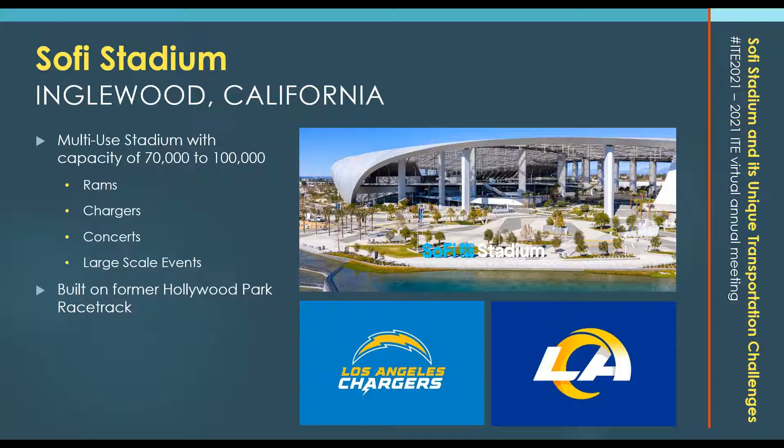But putting in a new stadium is never without its challenges. For starters, the SoFi Stadium is essentially right in the middle of the city of Inglewood. After review of the most recent stadium builds and a few classic ones, the average motorist distance to the highway is significantly higher with the SoFi Stadium. Obviously, this driver distance from highways isn't the most important metric, but it can heavily impact operations from signalized intersections, pedestrian movements, and other factors that bring friction to inbound and outbound traffic flow.

The bigger point is that many other sites are close to the highways to push traffic into free flow operations quicker, whereas the SoFi Stadium exists on a grid network with multi-directional traffic flows, resulting in higher impacts at the core and on existing background traffic operations. So the big question is, what's the best way to get folks in and out?

Developing a stadium in the middle of a built-out city comes with challenges. The first challenge is SoFi Stadium is surrounded by mostly residential neighborhoods. Furthermore, Inglewood houses a large number of people of color and lower income residents. Due to the makeup of the city's demographic, the effects of gentrification and displacement are already felt, and building in a stadium only worsened those effects.

When putting the traffic management and operation plan together, one of the primary missions was to minimize the impacts to the quality of life for the residents. And adding onto our big question, how do we get stadium visitors in and out while not negatively impacting the quality of life for its residents?

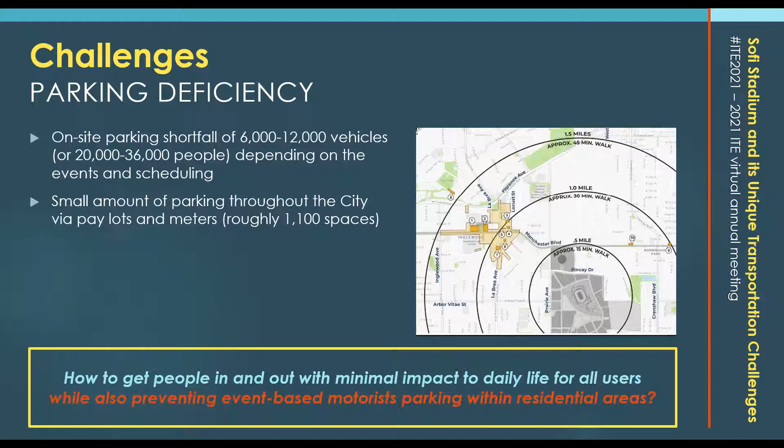To get a ballpark estimate on where the future vehicle traffic might be coming from, we use zip code data of where past Chargers and Rams season ticket holders were located in developing this estimate. This data is a proxy and might not fully reflect the true conditions, but it allowed us a starting point to iterate from. We then percolated those numbers through a volume distribution model that factored in parking lots, preferred routes, modal splits, and more to determine the path that users might take, as well as determining critical points of congestion and possible signal timing updates through our analysis model.

We also collected data at certain locations during normal operations to not only gauge current traffic levels, but also in developing flexibility by overlaying the event data over differing volume cases. This allows us to model unique situations, such as an event occurring during the PM peak at the same time as a forum event, or any other unique case we might be interested in evaluating.

We've talked about the challenges of this plan, but how do we address all of them? We've broken up the traffic management and operation plan into 4 key solutions: having traffic control officers at special intersections, stadium operations center, traffic signal timing, and transit and alternative transportation modes.

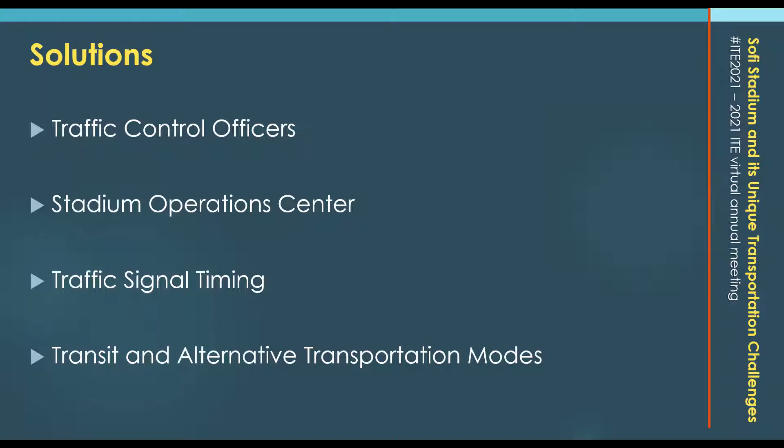The first we're going to discuss is the traffic control officers. We utilize traffic control officers at critical locations during event day operations. The TCOs ensure users are utilizing event day closures and geometric changes in a safe and efficient manner and get to observe what works and doesn't work for future events. They also help to mitigate any on-street mishaps that may occur, like a minor crash or driver confusion.

We expect a wide range of users on the city streets, including out-of-towners, and having someone point them in the right direction could drastically minimize effects when looking at a larger magnitude of visitors. Since we are prohibiting event parking on residential streets, traffic control officers help to minimize those impacts through presence and guidance.

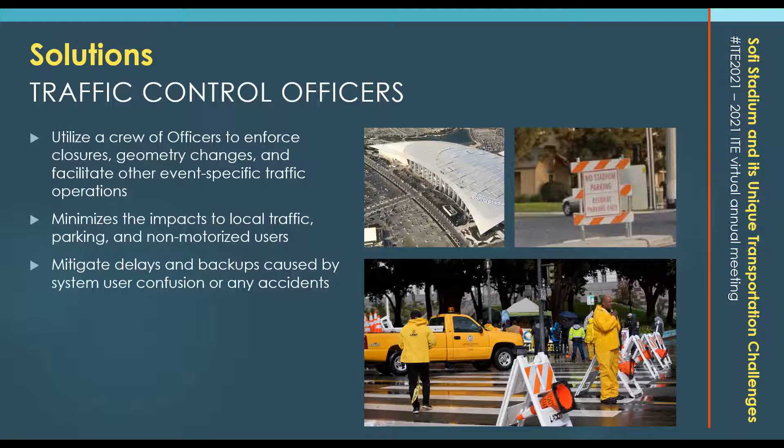In addition to having eyes on the street through officers, we also have 2 event day operator positions in the Stadium Operations Center to view all operations of traffic, signal timing, and ITS needs through live camera feeds. The Stadium Operations Center houses key personnel from the city's traffic, maintenance, police, fire, and parking divisions to create a streamline of communication with the stadium.

This central system is critical to the success of the traffic management and operation plan as it provides live views of traffic and is used to control the signal timing and arterial traffic flows.

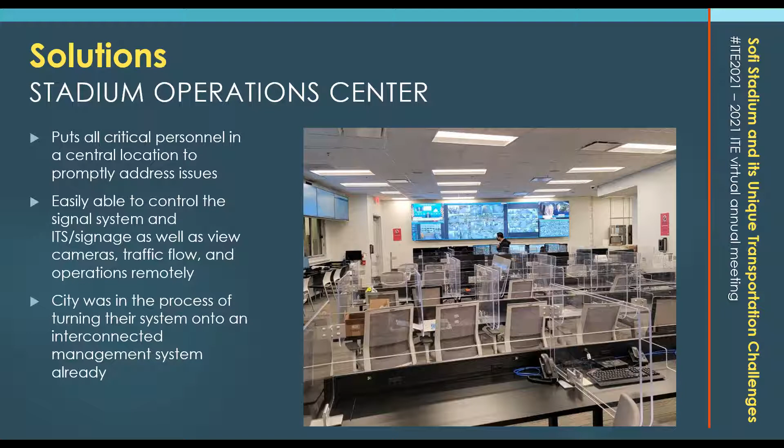A large part of our plan was developing adequate traffic signal timing. We discussed making everyday work for the city, and that goal was furthered by optimizing all of the city's 140 signals for daily use through creation of 3 to 6 timing plans. These plans progress vehicle traffic while still creating safe operations for pedestrians, motorists, and bikes by updating clearance parameters and walk times while still minimizing cycle lengths.

When it came to game day operations, we created 3 total plans for inbound and outbound traffic that use varying flexibilities in their traffic volumes. These plans were able to be turned on system-wide or by corridor from the control center, creating the opportunity to enable the necessary operations where and when they're needed in a customizable way.

Given the grid system of the area, we wanted to ensure that all of our corridors worked with each other on a cross-coordination standpoint. We also dug deep into creating systems of harmonic cycles, especially in the case of event operations. We're able to give higher cycles in the event core where critical conflicting movements are frequent, while creating half or even quarter cycles in the fringe and underutilized corridors.

This allows for traffic progression without the unnecessary cross-street and pedestrian delays, speed increases, and non-compliant safety issues that long cycles can cause. Lastly, we were able to progress our priority routes, such as our transit-only routes or reversible lanes into and out of the stadium.

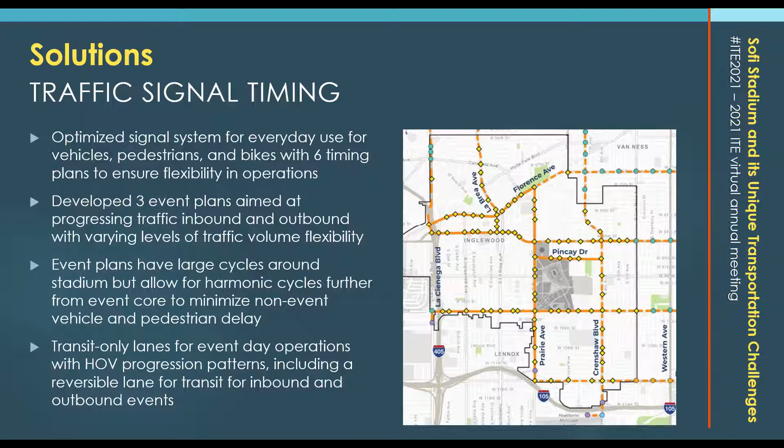Our last solution is related to getting people into the stadium in ways that aren't just parking on site. As you can see, we have many points to this, but we'll go over just the main ones.

We discussed transit-only routes, which our major route is on Arbor Vitae Street, which is directly connected to the stadium's planned intermodal on-site transit center.

In looking at other venues for the area, there's the ability to create a tailgate or party atmosphere off-site and bus fans in. The Hollywood Bowl does a really good job of this, for example, where the shuttle becomes part of the experience, and we took a similar note in our 9 park and ride shuttle locations.

The Crenshaw rail line isn't yet finished, but is anticipated to be a crucial aid in getting folks into the city and connecting Inglewood to the greater rail system for event traffic. We anticipate the line being open in 2022.

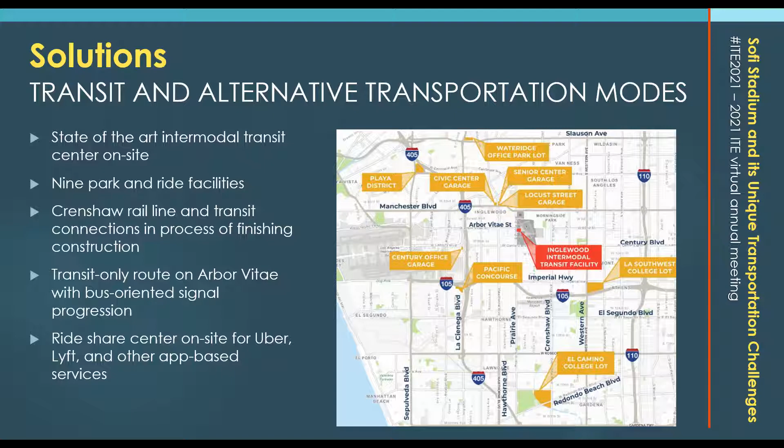The final touch is a rideshare center for folks that might choose app-based services to and from the events. These 4 major solutions really help to address the challenges the stadium might have with operations, parking capacity, and impact on resident quality of life.

Now the table is set for some big events with tons of fans coming in to check out the state-of-the-art stadium. Let's kick off the events with Taylor Swift headlining the first opening event of 100,000 people.

Now we all know what happened next, so we don't need to go too deep into that. But COVID-19 changed the plan for the stadium on top of the pain it caused in the rethinking of our current systems. The good news is that just like the rest of the world, we were able to iterate our plan and make things work out.

Also, it got Taylor to put out Folklore and Evermore, which, as a non-Swift fan, are actually pretty good. Anyways, back to the point.

Under COVID, there were some major hurdles to overcome, not only in our daily lives, but also in how the traffic management and operation plan for SoFi Stadium was previously envisioned. Construction schedules were impacted, funding sources frozen or eliminated, and traffic patterns changed.

However, one positive note came out of it: the luxury of extra time. This allowed the city to continue the build-out of the interconnect system, construct a more robust ITS system, fine-tune details of the plan, and determine if priorities changed and how to address them.

In addition, we were able to develop more flexible and phased operations that could more accurately reflect the slow ramping up of traffic volumes, activities, and events in general as restrictions are lifted. The ability to test our plan over an iterative process versus one large event is also extremely beneficial to fine-tune the process over time.

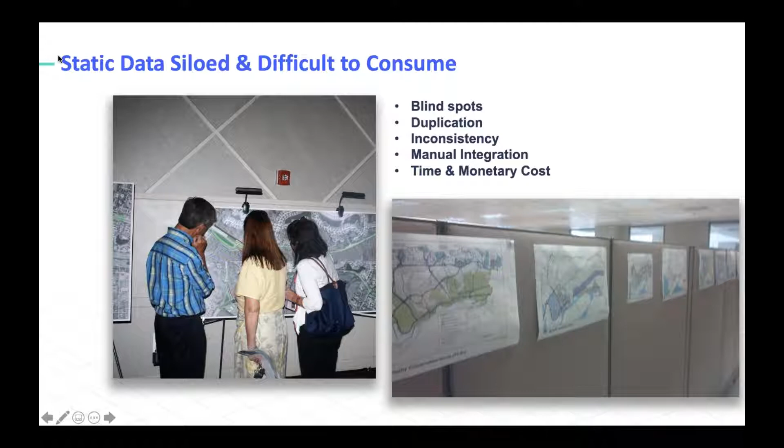And they're all facing the same challenge, that there's an explosion of data. More data is being produced every year than all of previous human history. But the tools that public servants have to access that data really aren't keeping up with the exciting opportunities of data. And data is oftentimes broken down into a number of different departments, agencies, jurisdictions, and even between the public and private sector, as we're going to show.

So what Urban Logiq does is take a 4-step process. We aggregate all of the government's existing data, regardless of department, agency, or jurisdiction. If it's something that should be made accessible to a public servant, we consume it into one common operating picture. We then automate workflows, identifying what decisions and insights you're trying to arrive at. And that often reveals where there is a data gap, as we discovered in the city of Ottawa.

And that's where I think there's an exciting opportunity to marry the explosion of data from the private sector, but bring it into a public service context. Once you have that complete data picture, you can use the power of artificial intelligence and data science to get to some very exciting insights.

I want to pause here and stress that in today's day and age, the issues of cybersecurity and privacy are forefront for all government leaders. So one of the things we stress is that everything we do and everything you're going to see is fully privacy compliant, whether it be the California Consumer Privacy Act, the GDPR in Europe, or Bill C-11 in Canada, and whether it be NIST or ISO certifications around cybersecurity. All of the systems we built are compliant to those highest standards.

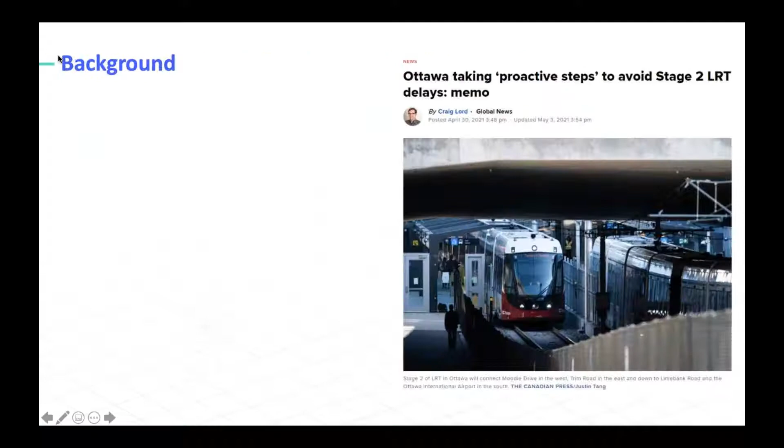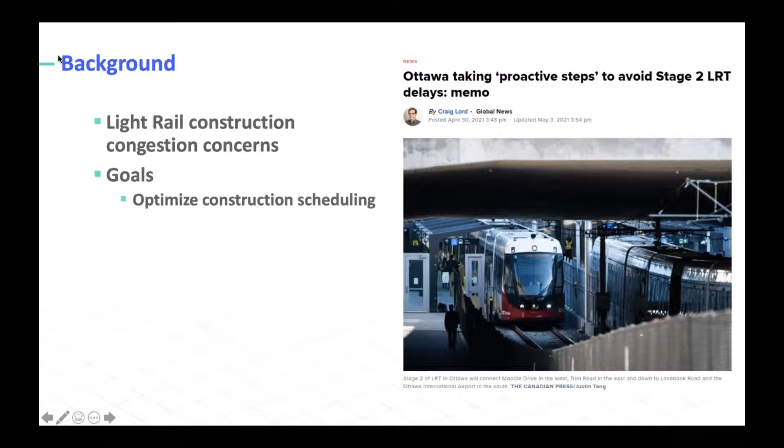So some background on the City of Ottawa. The city was building a major light rail investment in public transit infrastructure. But one concern was that as you build these large constructions onto busy thoroughfares and in front of retail shops, how is this impacting local businesses, and how can the government best quantify the impact on local communities and minimize it. So the goal was, using modern data science, could they identify the right time and place to do different types of construction projects?

Can you then communicate to stakeholders, whether it be small business owners or commuters, around it's best to avoid these roads at this time of day? Or if there were concerns amongst the business community who were opposing a lot of these projects, you could quantify to them that the impact on your business may not be as severe as you think.

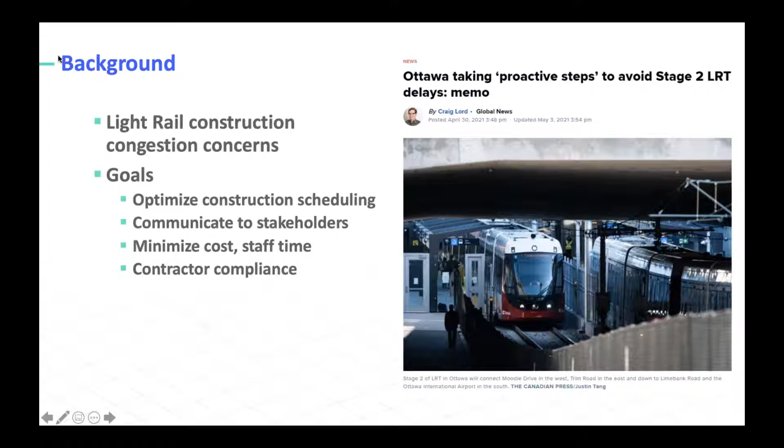And of course, one of the challenges any day and age is there's always the goal to minimize taxpayers' expense and improve staff efficiency. And then finally, contractor compliance. In a number of the cities we work with, construction companies are often told that if there's a threshold beyond which your project causes congestion, there are financial penalties and the like. So can this support the government in identifying which contractors are operating within the bounds of their agreements, and can you enforce compliance on those standards?

So the challenge that the city of Ottawa had was, first of all, if any of you have ever dealt with any type of road sensors or traffic counts, what you're seeing here is oftentimes just Excel or CSV sheets, spread amongst different agencies, departments, individual desktop systems. So to get a complete view of traffic in a real-time manner was just not going to be possible within the time-sensitive manner that they were looking for.

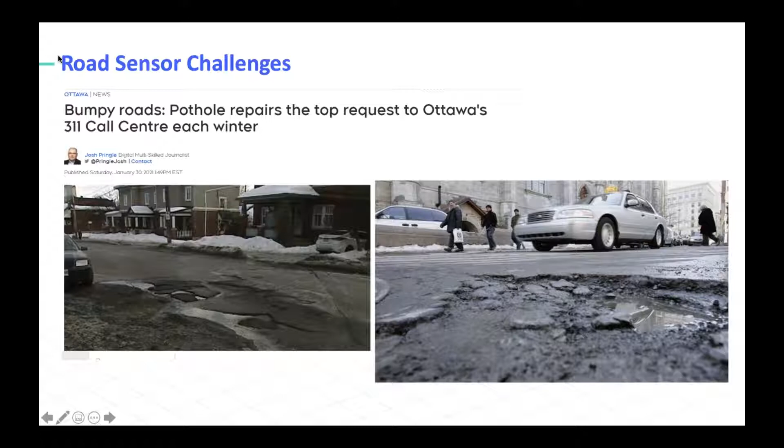In addition, the city of Ottawa is one of the coldest capital cities in the world, everything from hot summers to extremely cold winters, and that expansion and contraction of the road surface oftentimes tears up the road and damages road sensors. So it creates a challenge of getting accurate and real-time road sensor data.

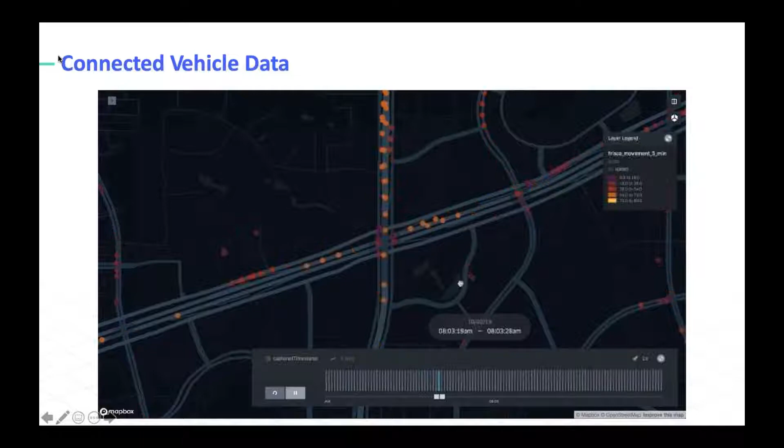So that was where Urban Logiq was brought in, and we examined a number of different data sources to see how you could supplement the city's mobility picture. Everything from connected vehicle data - this is data taken off of, for example, General Motors' OnStar system. So in a fully anonymized fashion, can you pull connected vehicle data around mobility patterns, so you can map how vehicles are using your roads.

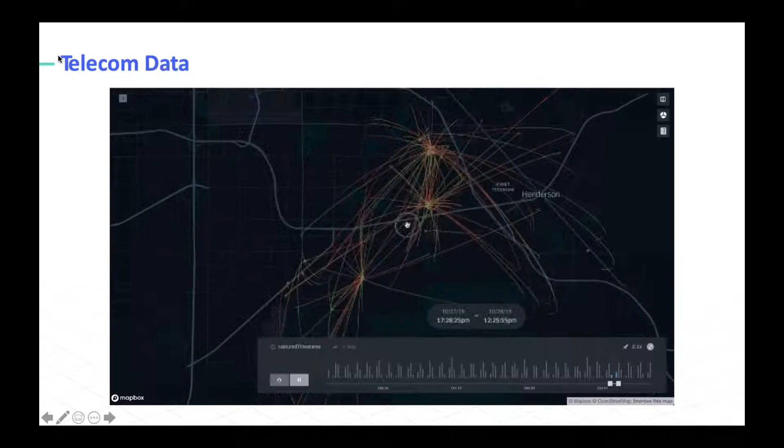Cell phone data - so whether that's triangulation through cell phone towers or location-based apps, fully anonymized origin destination data off of mobile phone apps. That also gives you a picture of how your citizens are moving.

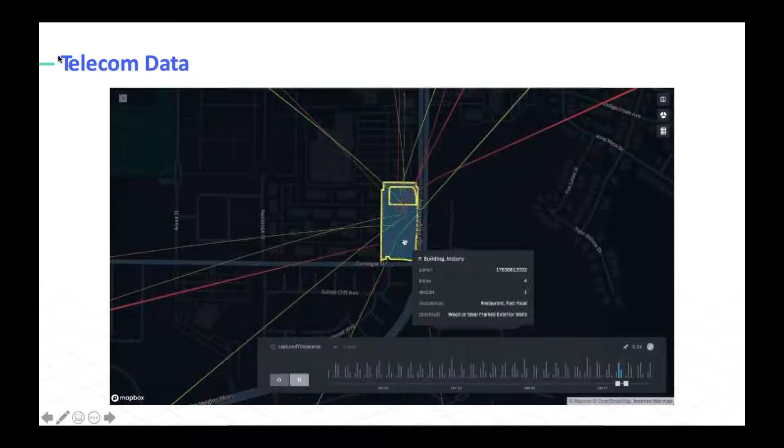What we ended up shorting the focus to was kind of two data sources. One was the existing bus fleets, so real-time bus location APIs, and they had a number of advantages - it was owned by the government, and it provided a regular picture of mobility. But at the time, I think it's improved quite a bit since, but this was a couple of years ago, the ability to pull that data on a very frequent basis would have overwhelmed the system. And also there were concerns around whether this was truly reflective of all the roads at all the times.

So after testing a number of these data sources, we ended up focusing on Mapbox and HERE data because it was a large sample size. It offered us real-time or near real-time insights of mobility patterns. And so what we did is we built a platform that ingested that data, married it to the Ottawa mobility patterns, and then built on top of that a number of travel time analyses.

One of the first benefits of this approach is instead of having to measure the entire city, we were able to geo-select just the areas of interest. And this led to a massive reduction in cost, because instead of having to layer sensors across the city or buy a citywide sensor database, we were able to micro-target just the areas of interest and make sure that they're only paying for exactly what they need to know.

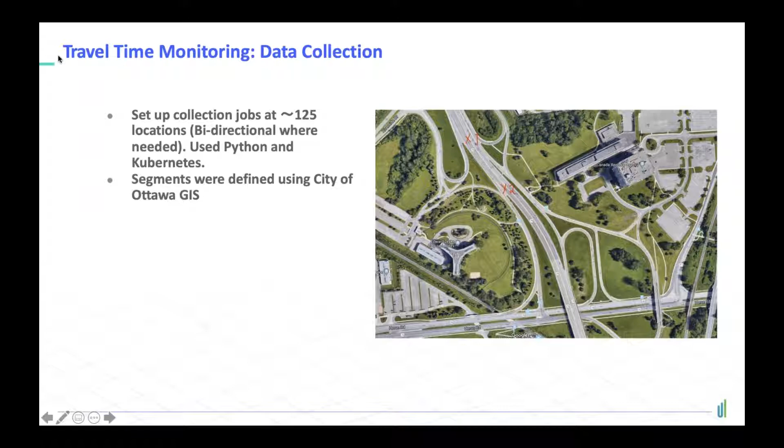We used the City of Ottawa's GIS systems and married it with them so that city officials could then use the platform in a manner that they're familiar with to identify the areas of interest. We configured it to 5-minute increments, so you can micro-target specific changes on a given road segment or intersection to a high degree of granularity.

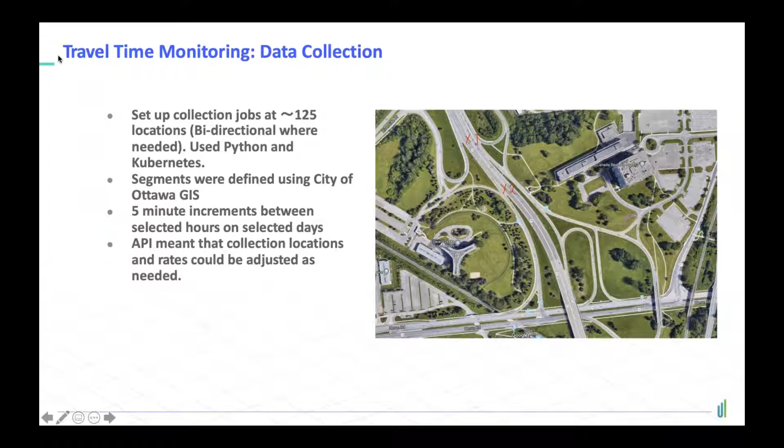And we built it in a way that instead of being a static picture of just these particular locations, city officials could move their area of interest at any given time of day, any given area of the city, and just pull the data on a real-time basis of that area they wanted to examine at that particular time. So here's an example of what the platform looked like - it allowed government officials to pick a road segment and see what the travel times are bidirectionally. You could also pick multiple road segments and compare them.

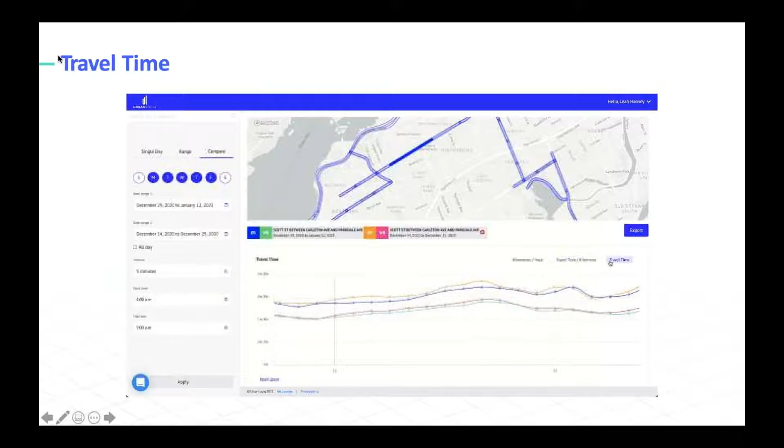So given two road segments, which would be the most efficient at any given time of day if you're trying to optimize traffic routing. You could select particular time windows and get a sense, at any given granularity, of what type of analysis you wanted to dive into.

One of the other things we're rolling out is a notification system. For example, if the city has a threshold where there's an unexpected car crash or other unexpected congestion, instead of monitoring 24/7 with someone watching these systems, the system can detect when an unexpected period of congestion or an unacceptable level of road time is emerging, and automatically notify the staff. That allows them to focus elsewhere and only put human eyes on something when it becomes pertinent to city operations.

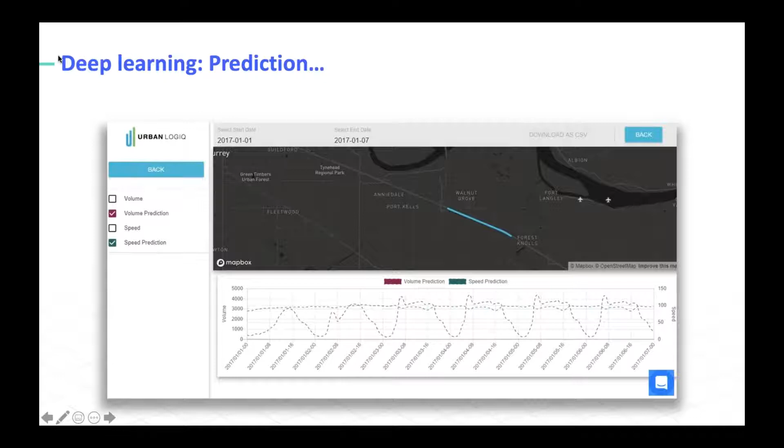One of the things we're building on top of that now is there's enough data that you can start to build predictive measures. So you can see this is a test case where we made a prediction for every given road segment and intersection of what speed and volume would be. And then when you go out and test against it, the dotted line was the prediction and the solid line is the actual result when you evaluate the actual traffic patterns that day.

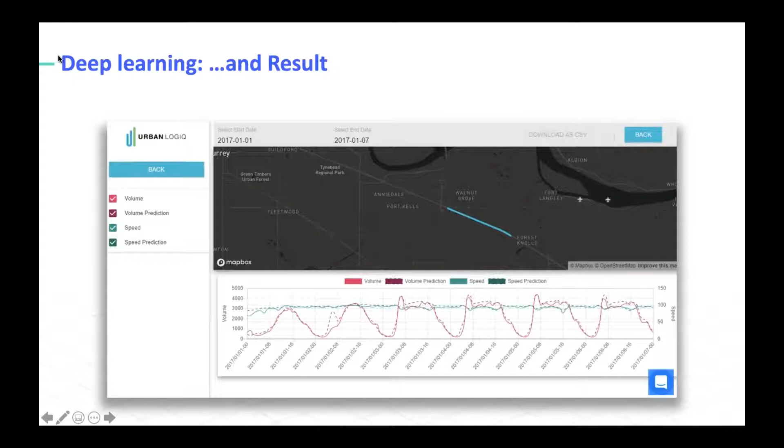This is allowing us to preemptively help, for example if a construction company is going to do road network work, we can look a few days into the future. Our limit tends to be about 4 days because weather is a big impactor of congestion. But looking 4 days out, we can help them understand that if you're going to tear up a road, this particular time of day is when you'll have minimal traffic, giving you the ability to minimize the impact on congestion and travel time.

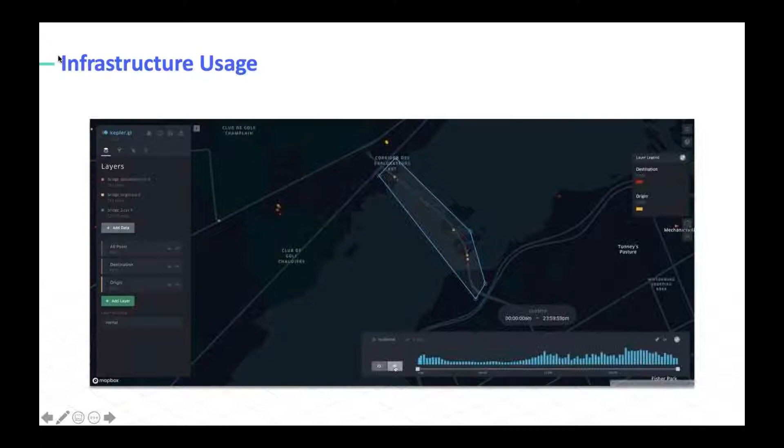This also helps with a lot of analyses we're doing around whether, if you're going to invest in certain infrastructure, are you doing so equitably? Are you overserving one neighborhood and one population and underserving another?

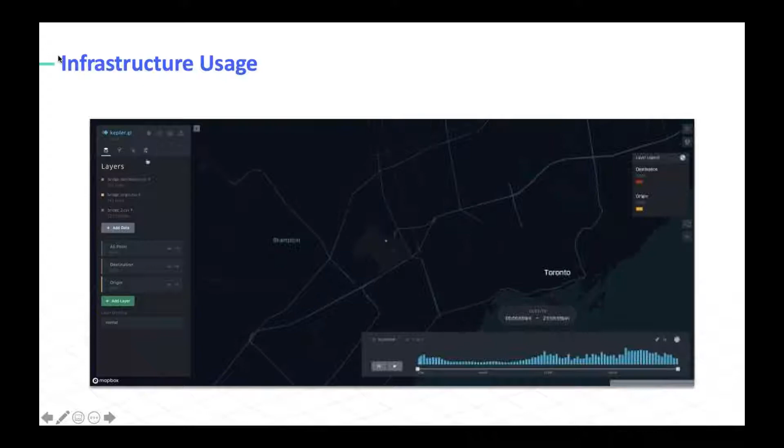This also opens up exciting opportunities around urban planning. If most of the people traveling from one jurisdiction to another, crossing that bridge, are actually coming from a given neighborhood, then maybe you can relocate some city amenities, services, or businesses to minimize the number of vehicle miles traveled.

Some of the lessons we learned coming out of all that is that there's a number of data sources being made available. If you just think of mobility data, there's inductive loops, pneumatic tubes, manual counters. There's also now computer vision cameras, connected vehicle data, and location-based app data. One of the things we stress is that one data source isn't the best source for all use cases.

What's important to understand is what are you trying to solve for, and what are the attributes you're going to need? Once you identify the attributes needed to drive your insights, you can identify the appropriate data source, and even minimize the expense if you only select the sample of data that covers your area of interest.

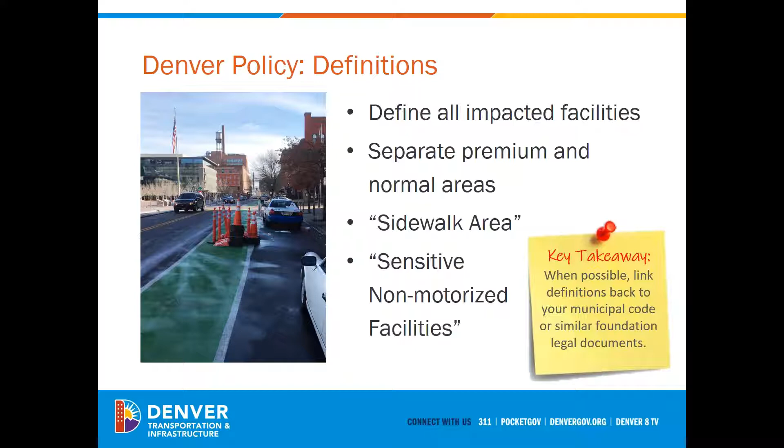You want to be careful that you are defining those and according them some value in your policy. And whenever possible, make sure you're linking everything as much as possible back to your municipal code. That gives you a bit of a stronger foundation on the legal side of it.

With those definitions in place, we set out our high-level prioritization policy. I have to say, hats off to Washington, D.C. for their fine example, which we ended up emulating for this.

When we started talking with our inspection staff within DOTI, they helped us with that definition of what would be a long-term closure versus short-term closure. You might have more notifications, more robust traffic control review, etc., if it's going to be long-term. That number of 72 hours came from our inspection staff.

One thing I'd reiterate is that when we had a project, everyone was trying to discern how much more this would cost to do. We were trying to put in a bus shelter next to a parking lane, or a bus stop—temporarily the bus stop isn't there, and we wanted to detour that bus stop or the pedestrians into the road.

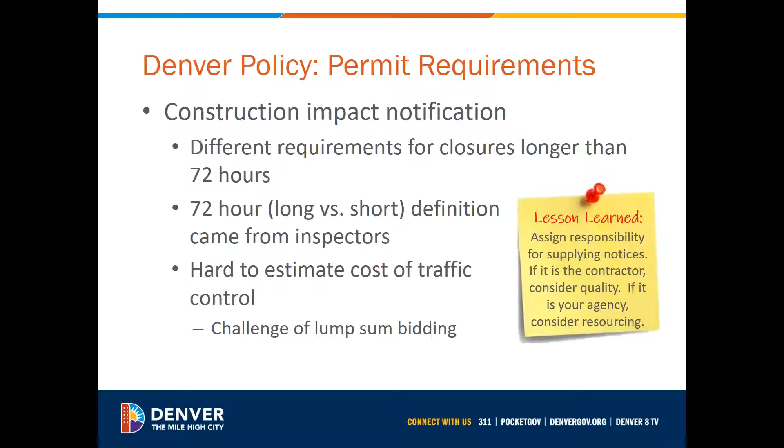In terms of permit requirements, we wanted to keep facilities open if we can, and otherwise consider, if we had to, doing a mid-block closure with a proper crossing mechanism like a signal or RRFB or something like that in order to get pedestrians across the street. We would be doing that.

One thing we've noticed—and Shane's going to have a look at this down the road—is that the fees are very, very different. One of the ways you can encourage contractors to keep the sidewalks open is by looking at the costs associated with that sidewalk closure versus other facilities to close a travel lane.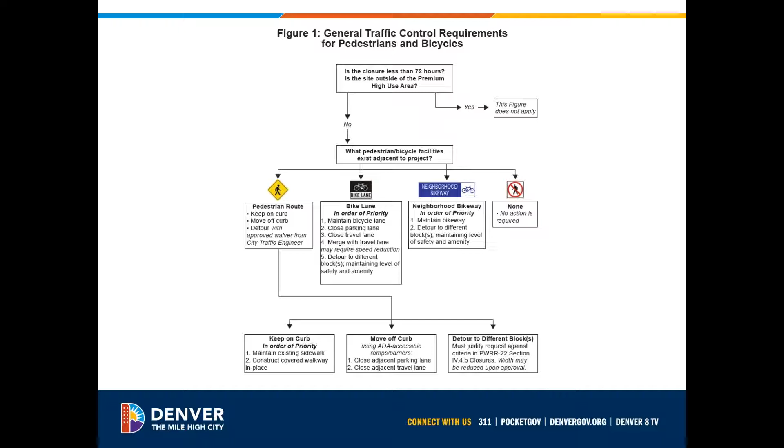One thing I alluded to earlier is that, in addition to having this rule and regulation, which means essentially when we have a permit there are costs associated with that permit from external partners, versus...

DOTI policy and procedure. For example, if you have a policy and procedure about when canopies might be needed, when contractors might need a parking plan associated with their closure, there might need to be certain lighting requirements, etc. Those kinds of things can be done in a policy and procedure and don't need to be in a rule and regulation.

We also were considering non-work zone related closures, and special events come to the top of that list. So you have fairly standard special events, races, festivals, and parades, and then you get into some more unique ones, such as block parties. Denver Days is an event the city does citywide to encourage neighbors to get out and meet each other, and as part of that, they try to make it as easy as possible to organize, including minimizing the challenges in getting a road closure.

We found in trying to accommodate special event closures that there was a lot of coordination required across multiple different agencies within the city that we otherwise would not have been speaking with. A couple other considerations: filming for television advertisements or movies has different requirements and agendas from the city film office, which is trying to work on the economic development side. You might also want different requirements and costs for nonprofits, 501(c)(3)s, or private events not open to the public.

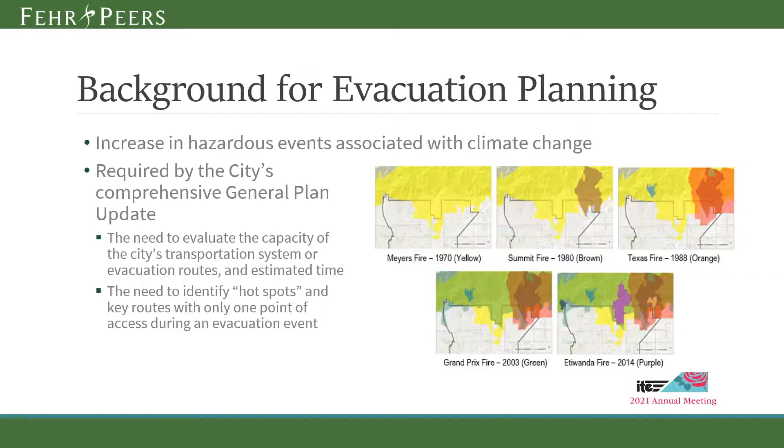As shown from these figures, it is important for the city to examine the current system to be prepared for evacuation of any potential hazardous events in the future.

First, to define the evacuation route system, the resilient evacuation routes for the whole Western Riverside County and the entire San Bernardino County were developed during the joint effort of the agencies in the region.

Once the evacuation routes have been identified, we start to assess the system resilience. To assess system resilience, we first look at the travel distance required to get from the evacuation area to a safe location, such as evacuation shelters and external areas of the city, which helps identify areas where accessibility is limited or long-distance travel is required.

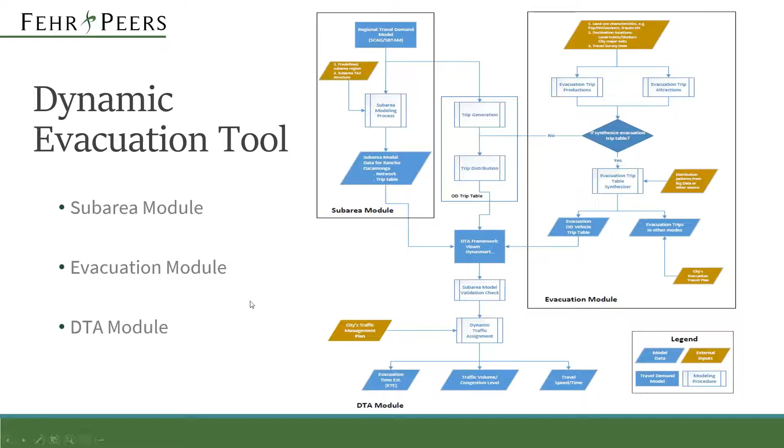After determining the evacuation travel demand and associated transportation network, a dynamic traffic assignment with 15 minute intervals is performed to reflect congestion and the departure time to estimated travel time. This assessment assumes an evacuation event during the morning commute period to maximize population evacuation from primarily residential neighborhoods, but also including significant commute background traffic on the roadways associated with typical commute travel patterns.

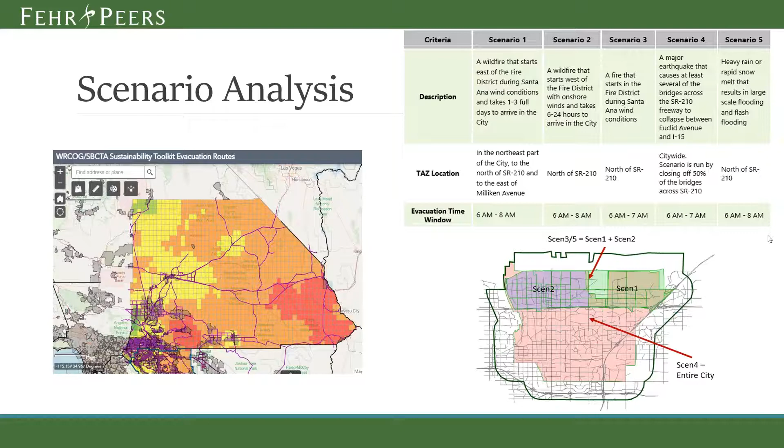As the approach indicates, the first step is to identify the resilient evacuation roadways. The graphics on the left shows the identified routes in a much bigger region than the city. The sub-area procedure is applied to generate the sub-area roadway system for the city and associated table for the regular daily traffic.

Additionally, the southwest area of the city has been identified as having a further distance to the evacuation shelter during an evacuation event.

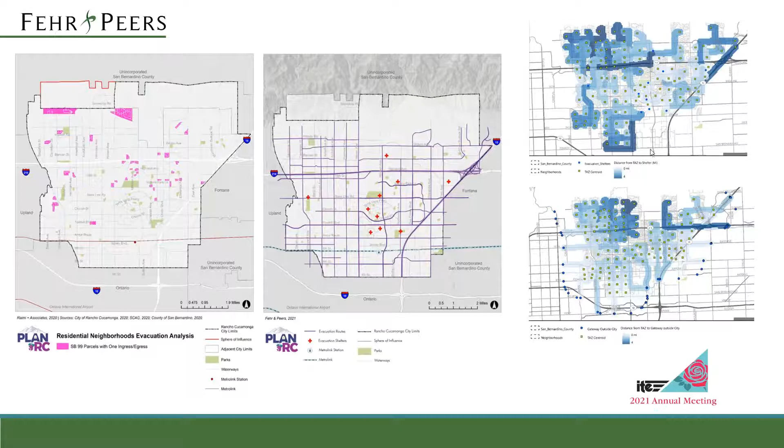The overall vehicle travel demand was based on the regular travel activity until the evacuation notice was issued. The travel demand for evacuation zones was separated from background traffic, which is not associated with evacuation zones. The number of resident anticipated vehicle trips per household and employees in the area were referenced to estimate the number of vehicle trips that would need to be evacuated.

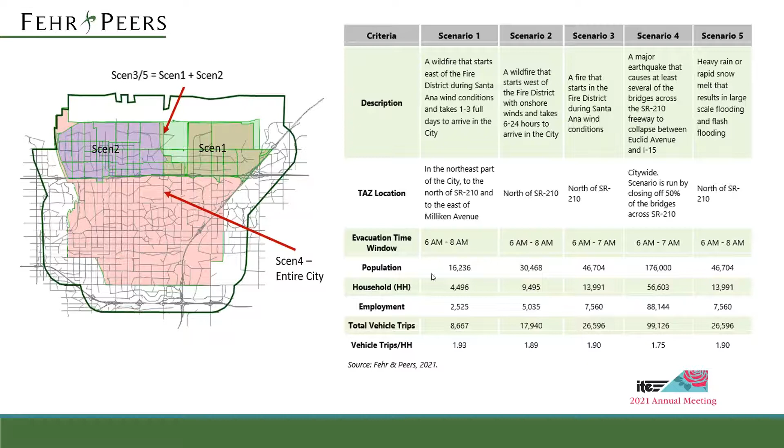The DTA procedure assigns vehicle trips in the designated time intervals to simulate evacuation scenarios. The DTA outputs of the tool for each scenario include dynamic roadway traffic condition in terms of time and the VC ratio for each time interval.

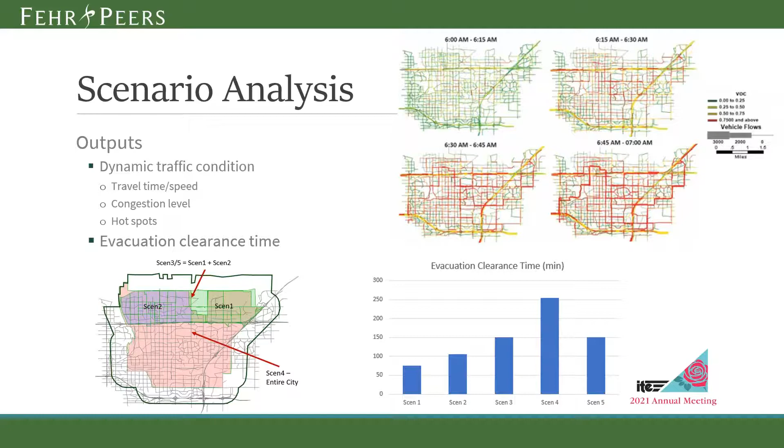Based on the outputs from the dynamic evacuation tool, we have conducted a comprehensive evaluation on the capacity of the roadway network within the city and identified the hotspots of the roadway system. At the end, we recommend to the city a range of potential improvements based on the analysis results. Some typical recommendations are listed here.

For example, ensure redundancy of critical transportation routes to allow for continued access and movement in the event of an emergency. And then provide more flexible roadway design to facilitate additional capacity when needed.

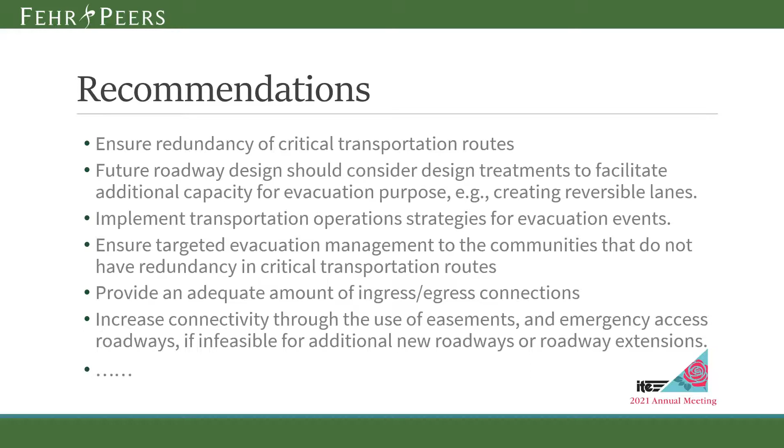Traffic operation strategies, such as using dynamic message signs to guide the evacuating traffic, and then apply different traffic control to ensure that the intersections will not be the bottleneck for the evacuation traffic. And of course, we also recommend other strategies that can be applied to enhance the accessibility and the capacity of the evacuation route.